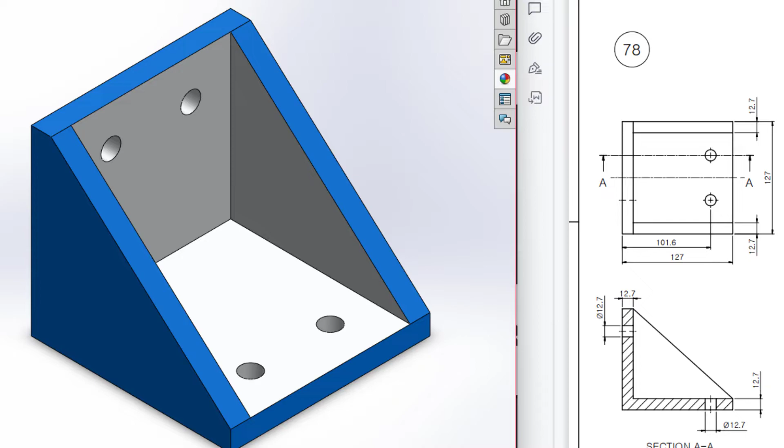Today we will solve this problem. In this problem, we can say this is the isometric view, this is the top view, this is the front view, and this is the right side view.

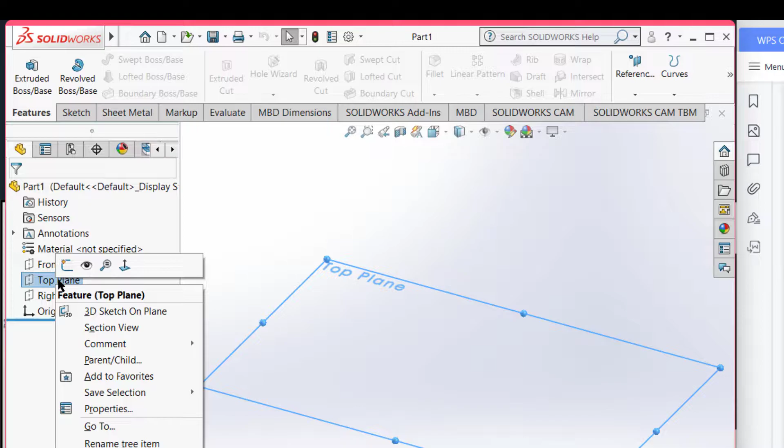Here, we will start drawing from the top view. First, we will draw a square of 127 by 127 units. Let's get started. Select the top plane, select sketch. Now select the center rectangle and draw a rectangle of 127 by 127.

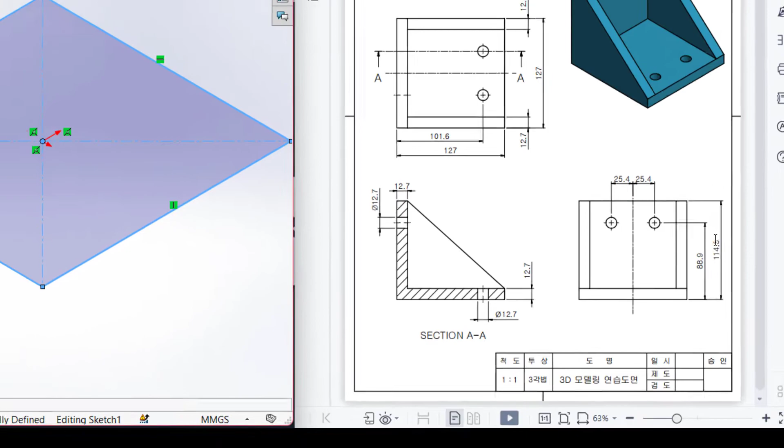Now here we can see that it has an extrude boss of 114.3. Now go to features and extrude boss 114.3.

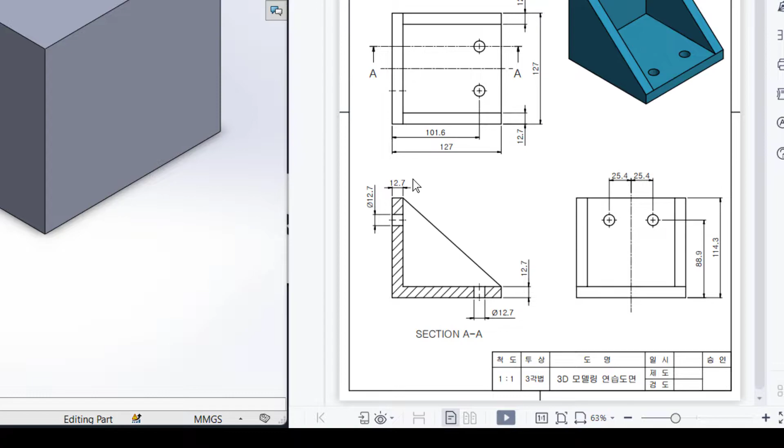Okay, now we can see that there is a cut. It is now a triangular shape, but we have drawn a square shape. Now make this triangular shape, which is 12.7 distance from here and 12.7 distance from here, and then cut this line.

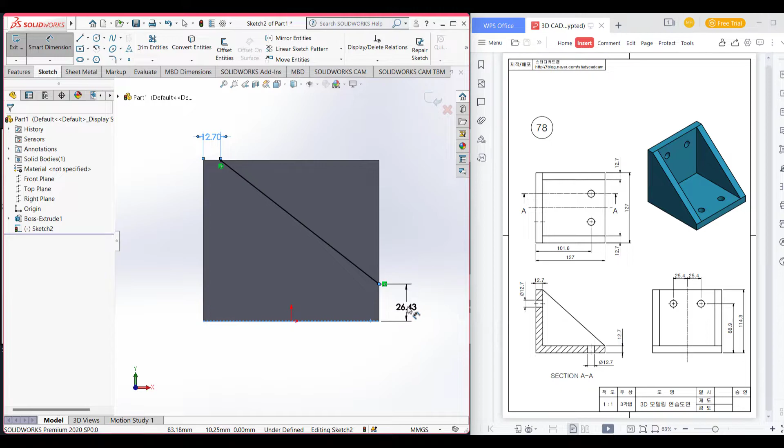So we select this face, then sketch, then select line and point this line to these two edges. Now go to smart dimension of distance 12.7, and also dimension this distance from bottom 12.7. Now close the boundaries. Select line and close the boundaries.

Okay, now we'll extrude cut this part. Go to features, extrude cut, and through all.

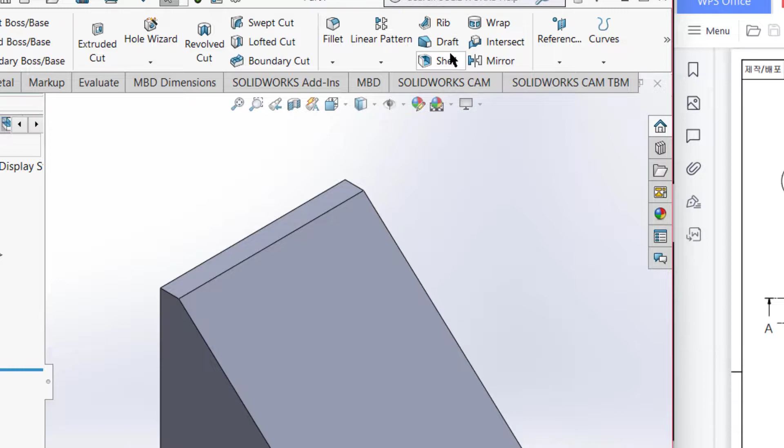Okay, now we can see that in every place we have 12.7 unit of distance, so we can use the shell feature. Now go to shell feature and give dimension of 12.7, select this face, and show preview.

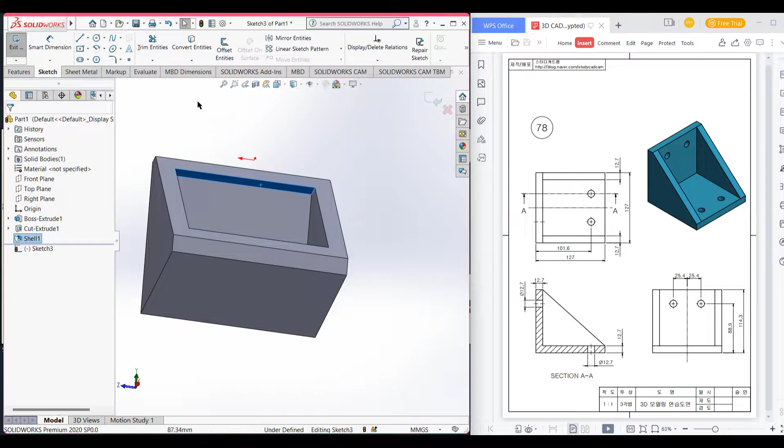Okay, but our shape is quite similar, but we have some extra parts, this part and this part. Now remove this part. First select this face and select sketch. Now convert entities. Now go to features and extrude cut.

Similar way, also remove this part. Select this part and select sketch and convert this entity, and now go to features and extrude cut.

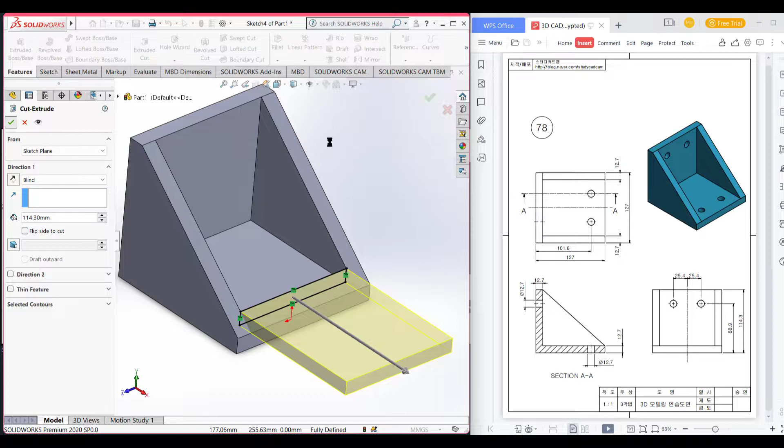Okay, now our shape is quite similar to this, but now we have to do the holes, which is 12.7 diameter.

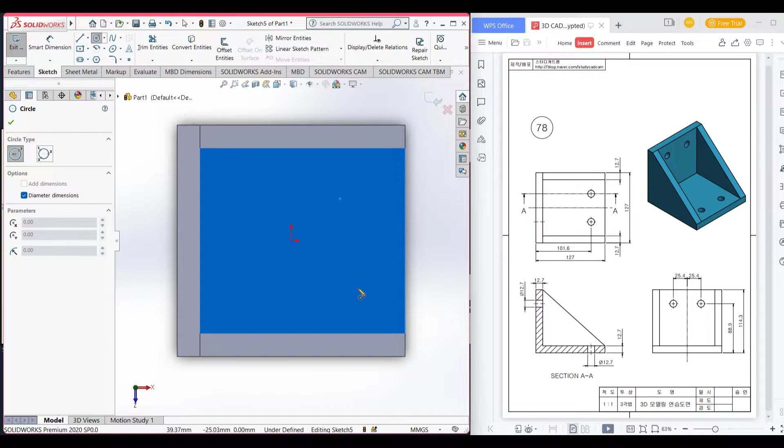First we will draw the horizontal plane. We can now select the sketch and draw a circle which is 12.7 unit diameter, and we can see it has a distance of 101.6. Now dimension it 101.6.

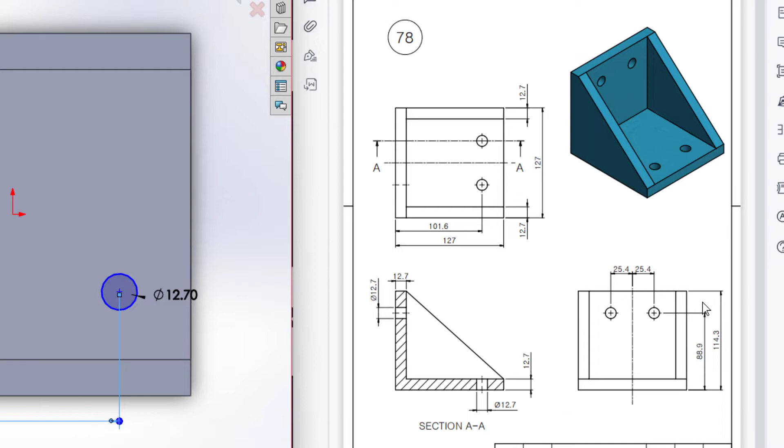Okay, you can see that here we have a part. How much distance? We can see both are 25.4 from center. Now we'll do this again. Go to smart dimension and select this origin and select this, and dimension it 25.4.

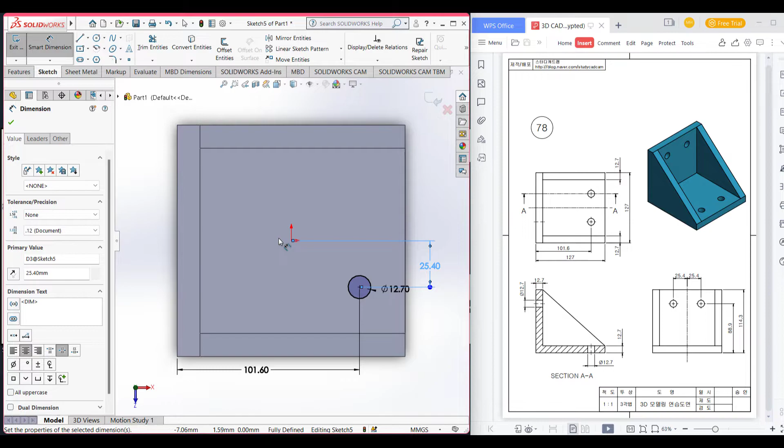Now we will mirror the other hole. Draw a center line, then go to mirror entities, select the circle and mirror about this line. Okay, now go to features and extrude cut this.

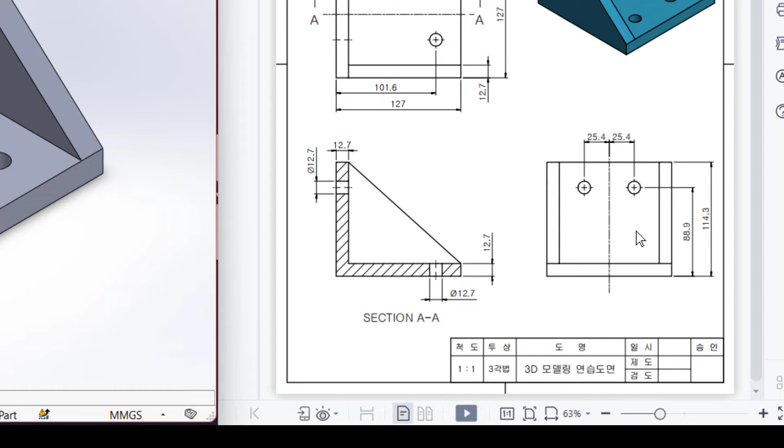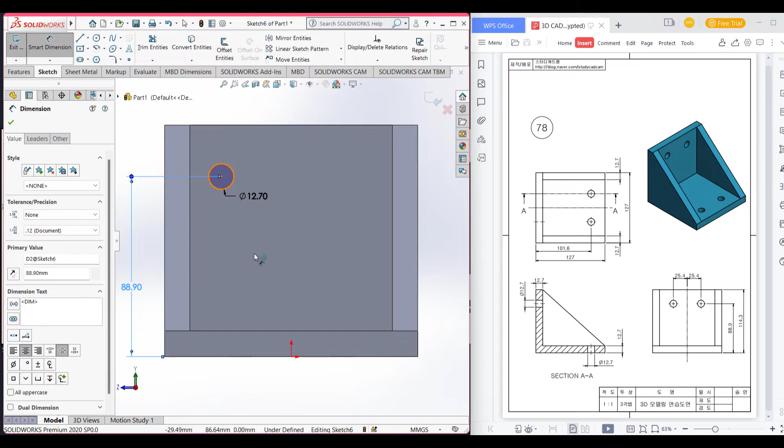Okay, similar way we also draw these two holes. Select the plane, now select circle and dimension it 12.7. Then go to smart dimension, it has a height of 88.9 from bottom, 88.9, and distance from center 25.4.

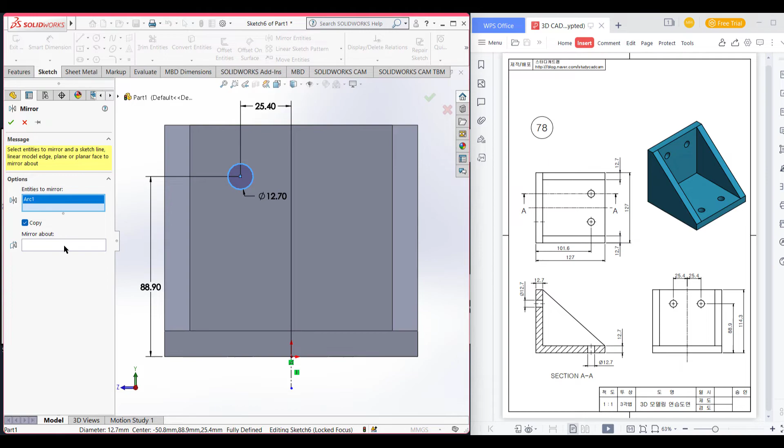Similar way, again select center line. Okay, now we will mirror this, mirror entities, select the circle and mirror about this point. Okay, now go to features and extrude cut this.

Now we have finished our part. Thank you for watching till the end.